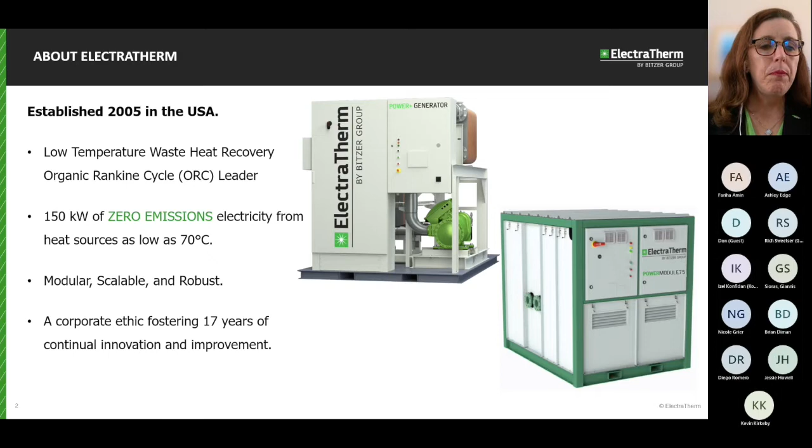We were established in 2005, but in 2016, ElectraTherm was acquired by the Bitzer Group, which is a global corporation. It's the world's largest manufacturer of refrigeration compressors and a centerpiece for our waste heat recovery technology. You can actually see that here. This is a version of what you'll see inside of our equipment. It is a semi-hermetic twin screw expander. It is manufactured by Bitzer, so there was a lot of crossover synergy there, and it makes great sense for us.

Bitzer, as a corporation, is represented across the globe with 3,400 plus employees, sales approaching €1 billion annually. The combined advantage of ElectraTherm's engineering, along with the value of being supported by such a large, reputable company as Bitzer, has allowed ElectraTherm to dedicate our energy and resources to the continual improvement of our product and the innovation of our proprietary technology. It's really a nice marriage of ideas and has worked well. So we're very excited by that and love that level of gravitas.

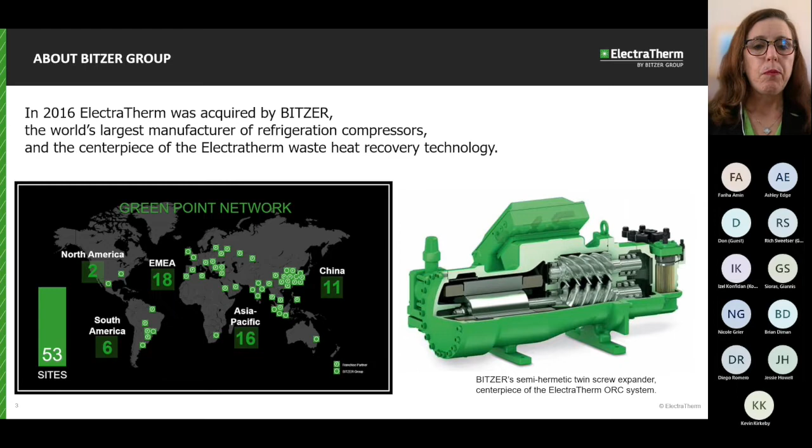All right, so now enough of that, and turning to landfill gas, which is what everyone came here for today.

Landfill gas operations specifically, I'm confident everyone on this call is aware of the more than impressive growth in this business sector over the last decade and a half, which is driven in great part by the demand in the state of California as related to the California Air Resources Board and the low carbon fuel standard.

You can see here we have a map of the EPA's landfill methane outreach program, candidate sites for new landfill gas capture projects. As extensive as the growth has been in the last decade, there is a great deal of work which can yet be done with regard to methane capture and, as a result, waste heat energy generation. So this is a market sector that is just, pardon my pun, on fire. But it is going to get nothing but larger, and the opportunities are impressive.

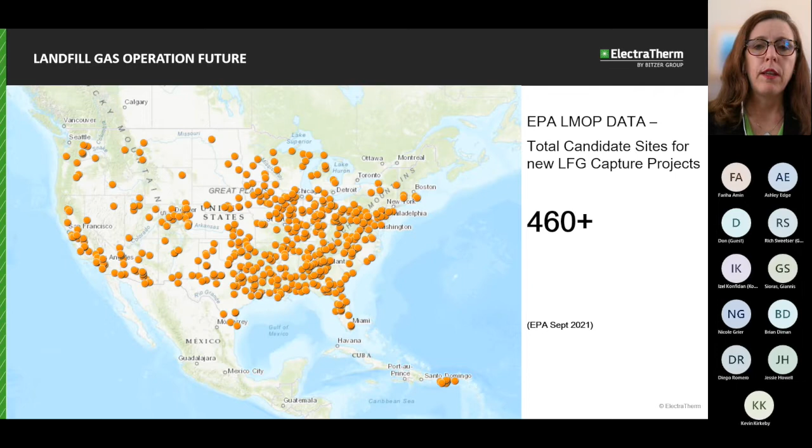Now, we have to give one moment to talk about the boogeyman in the room here, and that is CH4, methane, okay? Flare elimination is a problem for landfills, but it's also an opportunity, okay?

You see here we have an excerpt from the Wall Street Journal. This is from May 31st. This is very timely, okay? The EPA rules are expected to be finalized within the next year and would affect hundreds of thousands of wells, storage tanks, and natural gas processing plants, okay? When the new monitoring requirements are expected to go into effect is 2026.

That's very soon, okay? Flaring is the open air burning of natural gases, principally methane. We know this, okay? Commonly occurring in biogas production, wastewater treatment, during oil extraction. We know all this, okay? It releases large amounts of greenhouse gases that are major contributors to global warming, but mostly it's a waste of a natural resource, okay? But historically, due to the difficulty associated with storing and transporting natural gases, the easiest choice rather than utilizing it has been to burn it off.

The establishment of a robust RNG market through CARB, though, has largely and happily shifted the economics of this. Flares are still present in many locations, though, and recent government programs incentivize the reduction of flaring while beginning to impose fees for those violations. Capping the flare is difficult, or it has been in the past, but it has become economically feasible. You're able to avoid negative impact on the environment and the health of nearby areas. It's a very, very positive outcome all the way around, as far as ESG, as far as finances, and as far as your stewardship as a corporation in your communities.

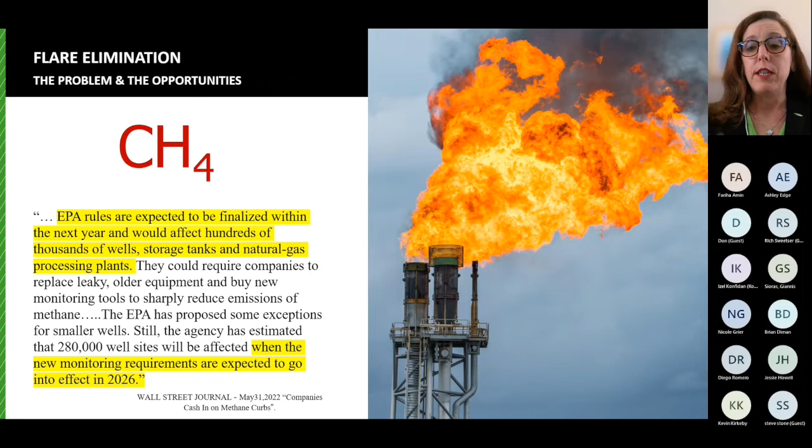Now then, how does ElectraTherm fit in with that CH4 flare capping strategy? How can the unused natural resource of the flare become an asset? One answer is, of course, utilizing an ElectraTherm organic Rankine cycle generator for heat recovery and electricity generation.

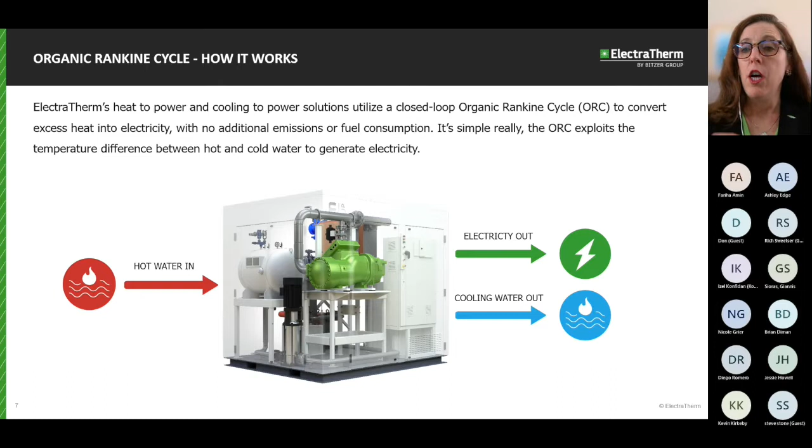How does it work? Well, it's exactly as we show here on the graph. It's very simple. You have a hot water stream in, goes through. The ElectraTherm heat to power cooling solution utilizes a closed loop ORC to convert excess heat into electricity. You take the hot water in, and then you get electricity out and cold water out. It's that simple, that's all there is to it. Very simple technology, not a lot of moving parts, low potential for failure, very reliable.

Currently, ElectraTherm has power generators sizes capable of 75 kilowatts and 150 kilowatts respectively. Each is available with or without an active cooler if additional cooling is needed, and/or elimination of an existing energy inefficient cooling strategy would be beneficial. Let me say that again: it can be available with an active cooler if additional cooling is needed, and you have the ability to eliminate an existing energy inefficient strategy. We're going to see that a couple times today, okay?

With regard to those sizes, though, for the 75 kW and the 150 kW, stay tuned. We have upcoming announcements on power generation capacity updates. We're currently in the testing stages for some very exciting new products, which will become available in the near future. And we will no doubt be announcing those developments in a future webinar event. So stay tuned for that.

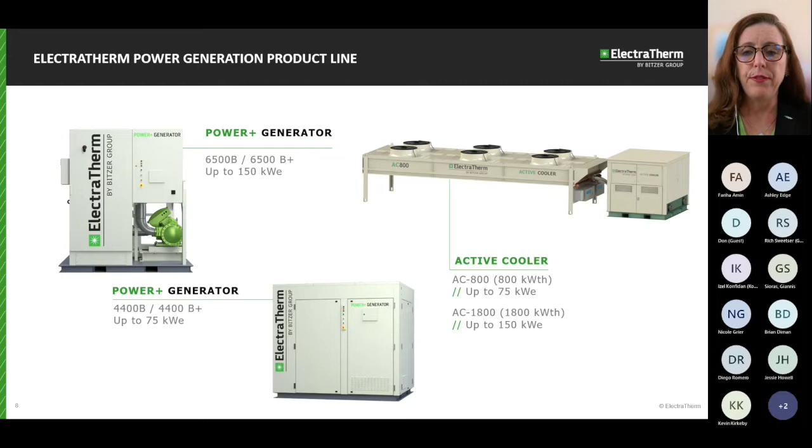With regard to landfill gas projects, there are 3 types of landfill gas projects commonly seen, and ElectraTherm power modules may be incorporated for zero emission electricity generation in all 3. Zero emission, all 3. Lots of opportunity, okay?

Project type categories include electricity generation, which generally includes engines, turbines, and cogeneration. Direct heat use, okay, that was a terrible circle. Oh my gosh, okay. Direct use, including medium BTU technologies such as boilers and other direct heat applications, direct thermal usage. And finally, renewable natural gas, including the options to sort by delivery method. That would be either pipeline injection or for local use.

All 3, again, can utilize an ElectraTherm unit to produce electricity, which can be used on site or sent to the electric grid, depending on your needs. But I'm going to make a case today that using it on site has some very valuable opportunities that I think you're going to be impressed with.

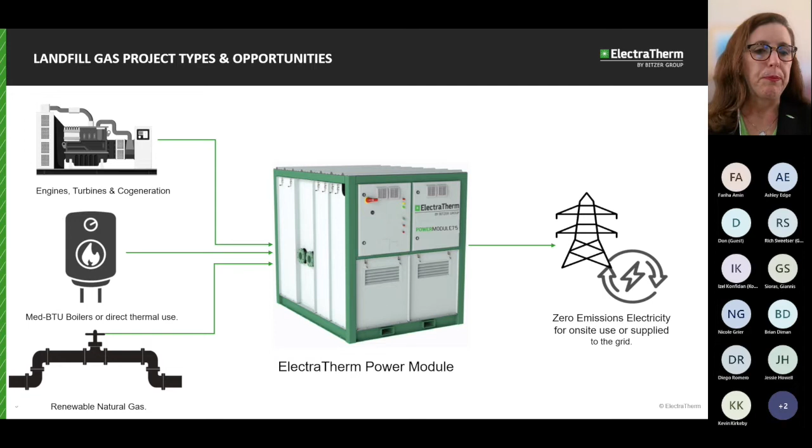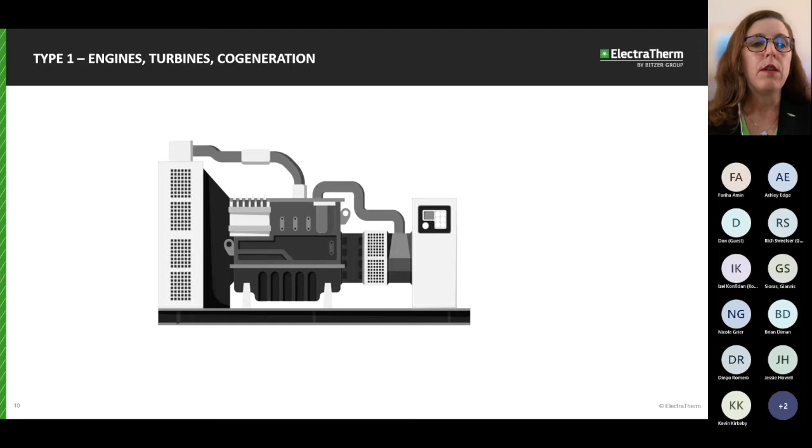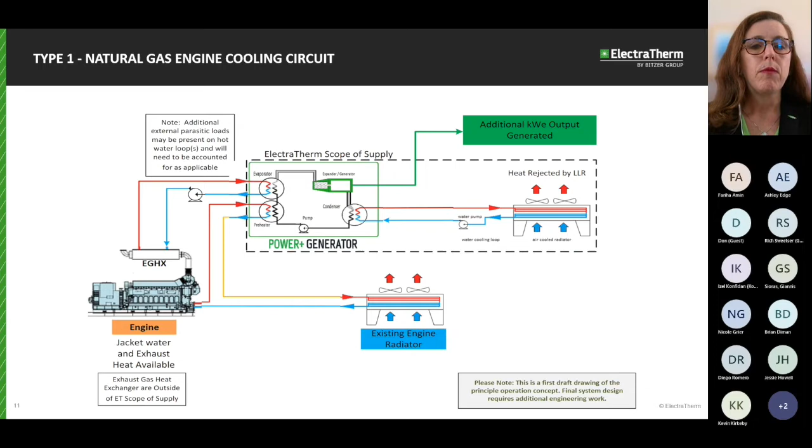Additionally, this traditional engine application presents an opportunity for ElectraTherm's active cooler. You can replace your massive radiator while actively exporting power. In short, the active cooler replaces a parasitic load of the radiator and generates electricity rather than drawing electricity. So what was previously a cost center to you becomes an opportunity to create zero emissions energy. It's very exciting. Again, you are offsetting the largest parasitic load of that engine.

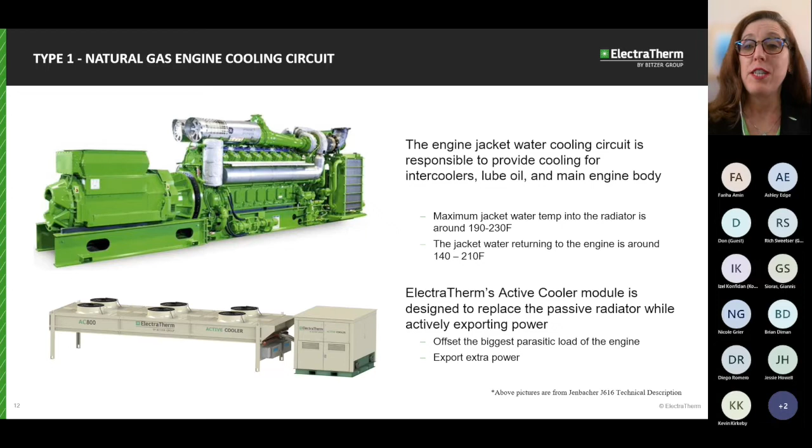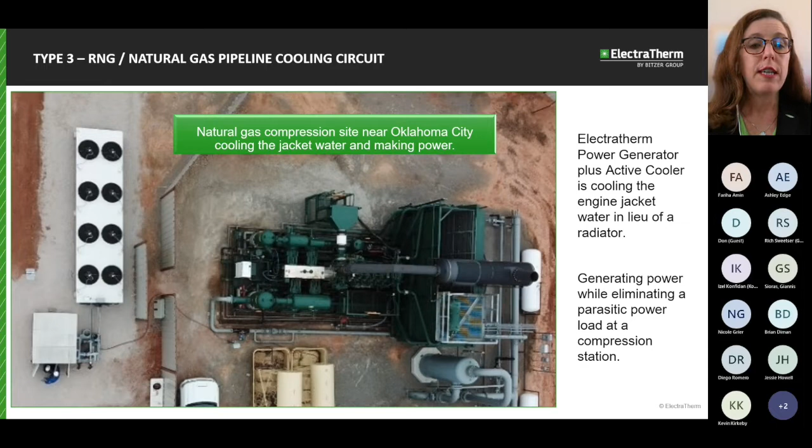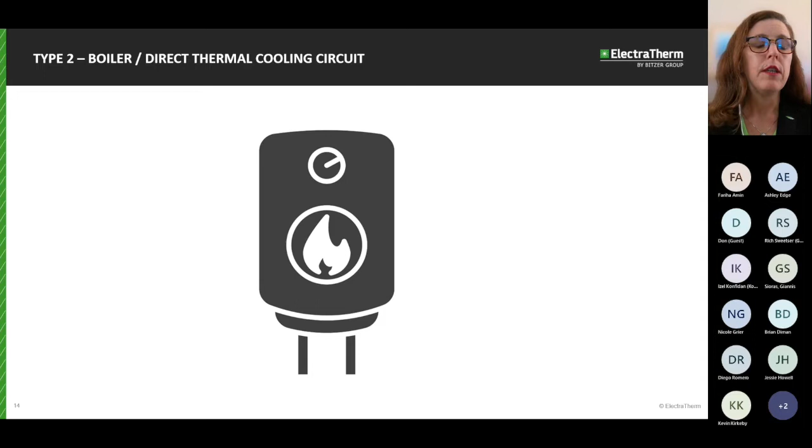Moving on to the second type, we have direct thermal cooling circuits as an opportunity. Here we also have a schematic. This shows boilers. Boilers are extensively used to provide heat to biogas and wastewater treatment plants. I think we know that. Boilers only work for a small portion of the time when the site calls for heat. They're only using that when it is part of the biogas or anaerobic digester process.

They create that heat. However, once you add an ORC heat recovery system, such as the Power Plus, or an active cooler, it produces power and consumes hot water 24/7. So that capital piece of equipment, that boiler, now becomes an asset that you're able to use 24/7. It is not encumbered by the same downtime.

By increasing the hot water production, power output can be maximized and flares can be 100% eliminated. That is fantastic. I'm going to say that one more time. You can increase your hot water production, your power output is maximized, and the flare is 100% eliminated. This not only reduces emissions, but it creates a sustainable base load of zero emissions power supply.

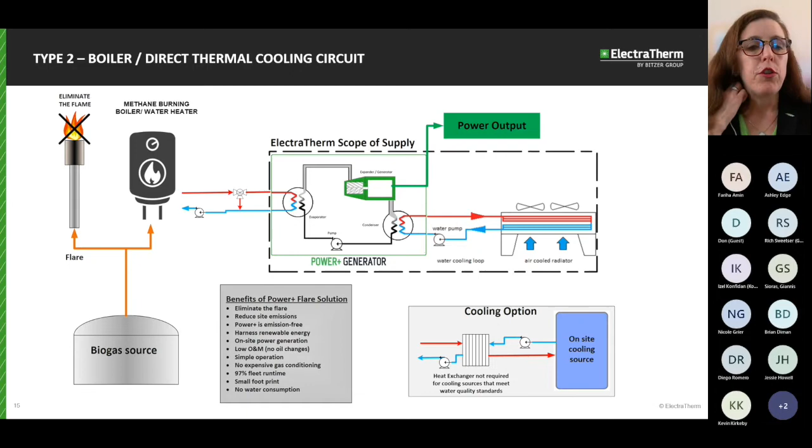You can see here your biogas source. We have a flare, which is where it would have gone historically. It is not going to do that anymore because it is going to power your boiler, which interfaces with the ElectraTherm system and your cooling option should you have it. This gives you all the benefits that you would want. You're able to create that power long term.

By capturing the flared biogas and using it in the plant's operation, they're lowering the reliance on fossil fuels. All of the energy is being consumed on site by the facility itself. They don't export anything to the grid. Everything is used on site. And the greenhouse gas emissions are being significantly reduced.

The facility's relationship with the neighborhood particularly has vastly improved as a result of the reduced environmental impact. They were able to cap a flare, which made the community very happy. They're extremely happy with this operation thus far. It was commissioned very recently, but the ElectraTherm project is actually being evaluated as a case study for potential future implementation at additional New York City metropolitan wastewater treatment facilities.

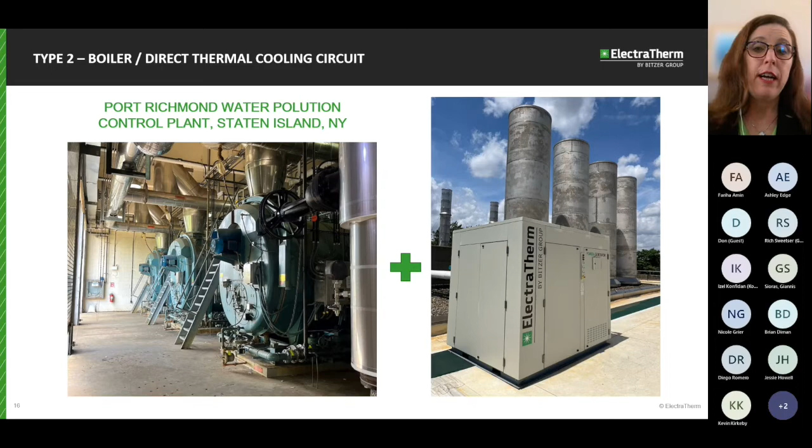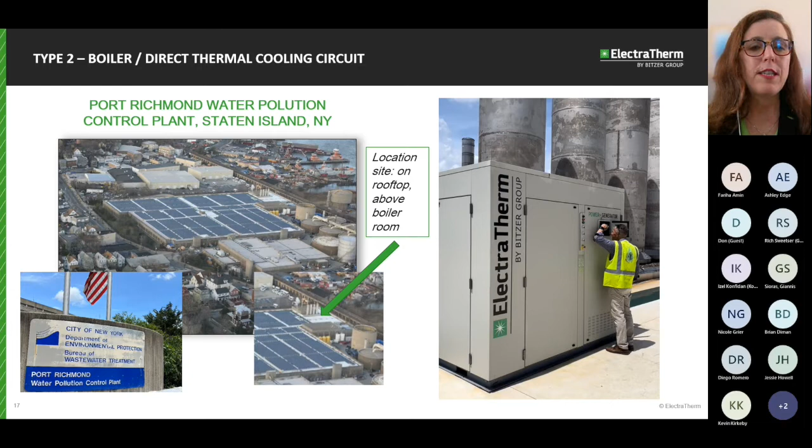It does not take a large footprint. It's very scalable, very modular, very easy to find a location to create this type of energy at your facility. There you go. This is, again, where it is, very tiny. Okay, now, finally, moving to type 3, which is the one that I'm sure most of us are here for, the renewable natural gas pipeline option.

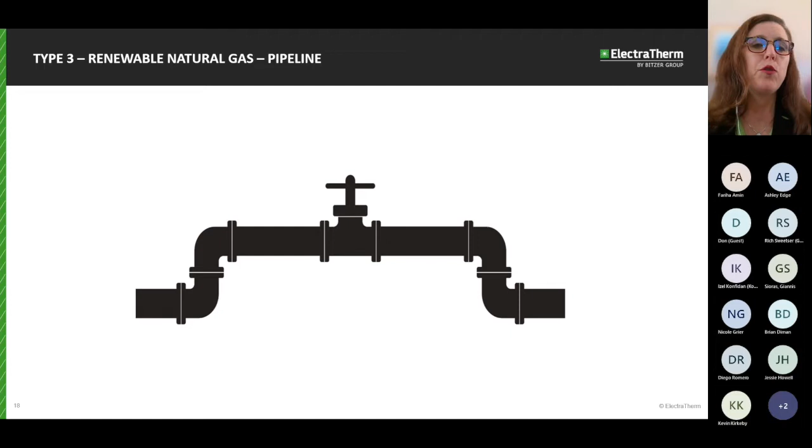Additionally, any style of existing or future candlestick flare associated with the RNG to pipeline architecture, for instance, off your waste gas, anything that cannot be cleaned up enough to go to the pipeline, anything associated with that architecture is also an opportunity for heat capture and electricity generation, similarly to that described in the type 2 direct heat capture topic.

But here you see a thermal oxidizer, which interfaces directly with the ElectraTherm unit, and you have up to 150 kilowatts of output. I want you to keep that in mind. Every unit that we make individually has up to 150 kilowatts of output within the space that I just showed you in the previous slide.

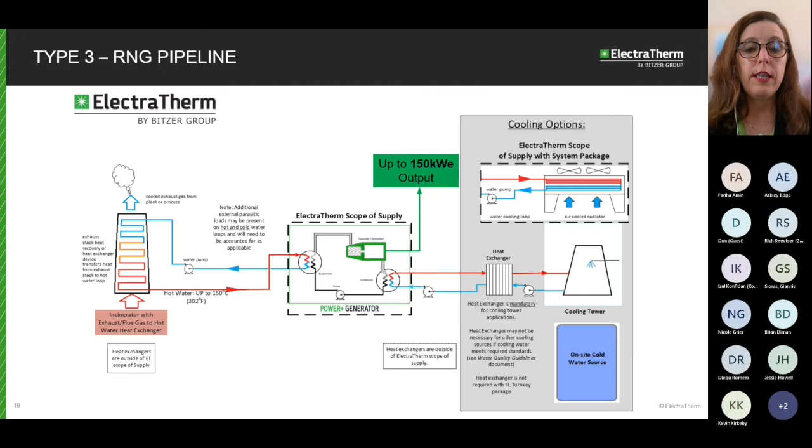So we've covered that. Now we're going to RNG operations specifically. What are the benefits of ElectraTherm to your landfill or wastewater treatment? You get it. You can do it. It's possible. What's the benefit, though? Where does the economics come in? Here's where we are.

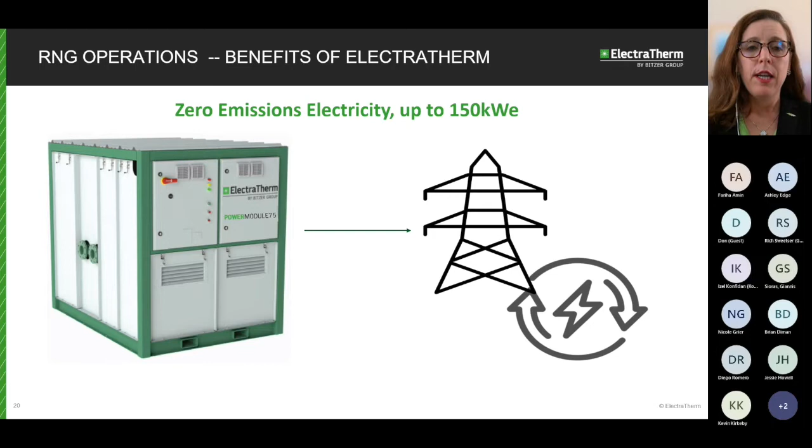The state of California. Almost everyone knows this, but the state of California is the market the vast majority of renewable natural gas and biomethane manufacturers are working to reach. And the reason is, of course, the credits being given by the California Air Resources Board, often referred to as CARB. And this is part of the low carbon fuel standard, which is also referred to as LCFS. There's a lot of acronyms. I apologize.

RNG has become an incredibly lucrative resource as a transportation fuel in California. You can see in this graph the biomethane production represented in the dark orange band. Here's your dark orange band. It has increased year over year since 2014, and the amount of carbon displacement accredited to biomethane reached nearly 2 million metric tons in the year 2020. That's approximately equivalent to 250 million gasoline gallons of transportation fuel. That is a lot of RNG being used as transportation fuel.

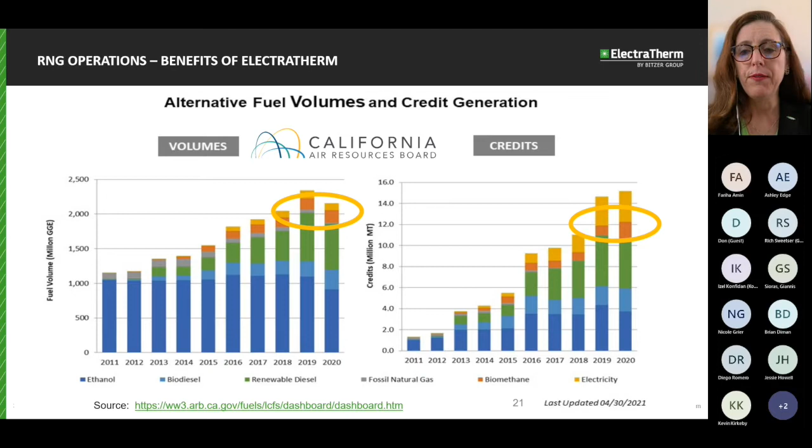Now, why is California using RNG instead of gasoline? Certainly not because it's easier to get. The reason is carbon intensity and the carbon intensity score. Carbon intensity is the emission rate of CO2 by a given pollutant, in this case automotive fuel, relative to the intensity of a specific activity, which in this case is transportation.

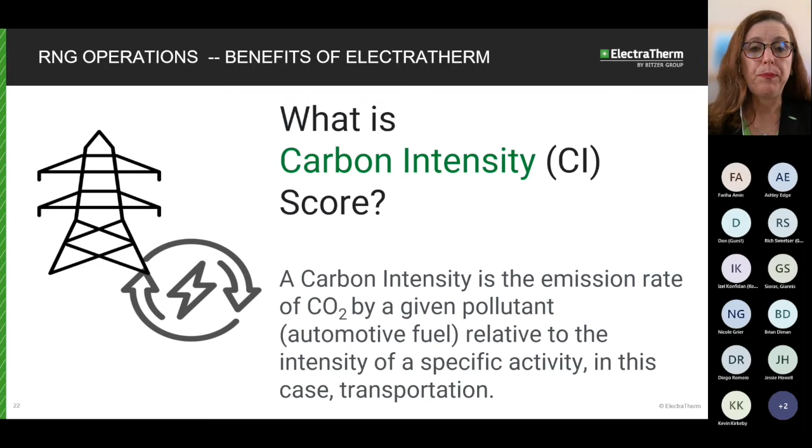This is the data that California is making all of these decisions on, carbon intensity. The price in dollars per gasoline gallon equivalent of alternate fuel is inversely proportional to the carbon intensity of that fuel.

I'm going to break that down for you. So the lower the carbon intensity your operation's RNG fuel is, the more it will be worth in the market. Okay. The lower the carbon intensity, the greater the low carbon fuel standard credit value. This is a difficult thing to understand for some people. We're going to go through it slowly. If you understand it already, I appreciate you sticking with me.

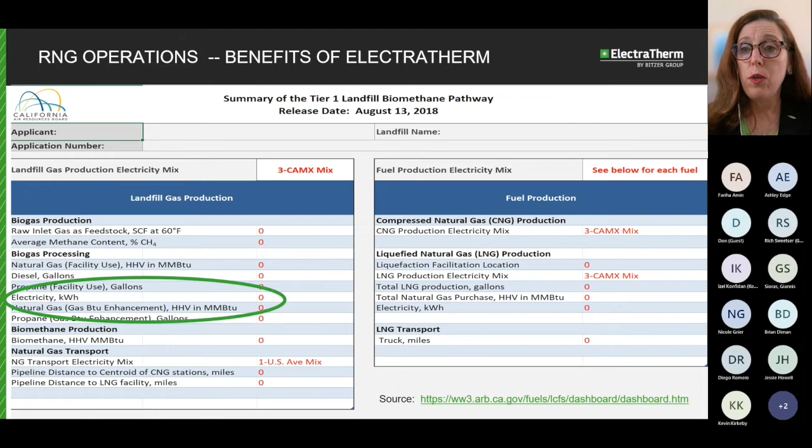Goes over here, okay? This is the production, section 2 of the biomethane production data. The landfill biomethane calculator shows here, section 2.9, the amount of electricity from the grid being used by a landfill facility.

Landfill facility, that's difficult to say. Say that one more time, landfill facility.

This is a value that you have to enter. Someone in your accounting department, somewhere in your operations, when they fill this out so that they can get their RNG application and start selling your fuel into the CARB system, they have to fill this out. They're probably going straight to an electric bill somewhere, pulling out the data, putting it in, moving on. Don't think any more about it, okay?

However, the electricity from the grid adds to the carbon intensity total of your biomethane fuel. This is an adder to your carbon intensity number. And we already know a low value carbon intensity number is what we're seeking. So it would follow anything you can do as a facility to reduce the total kilowatt hours usage from the grid would contribute to a decrease in your carbon intensity score.